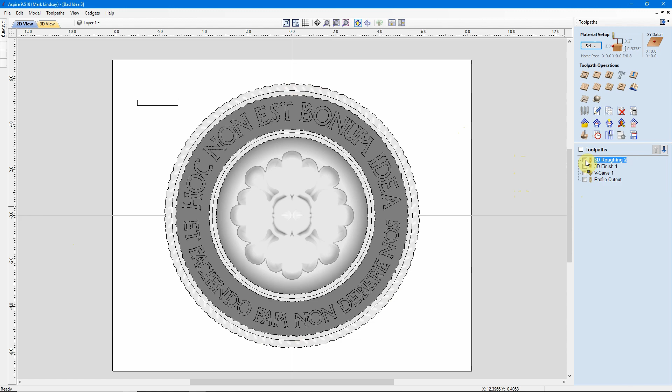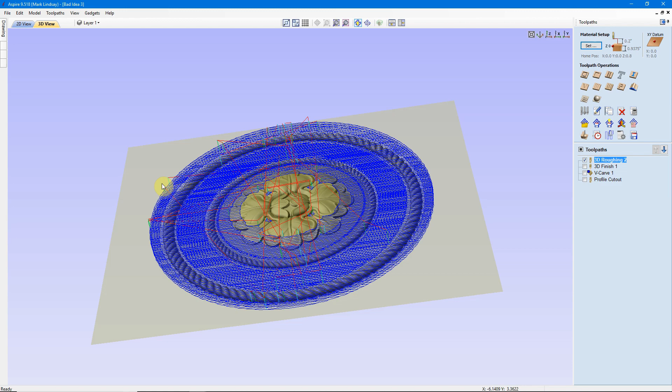Other times, as in the case of the 3D sign I cut before, when we look at the toolpaths we have a 3D roughing toolpath. In the 3D view we can see the red lines in the illustrated toolpath — these are all rapid moves. The blue lines are plunge moves, and the green lines are retract moves. We can see they're willy-nilly all over the place.

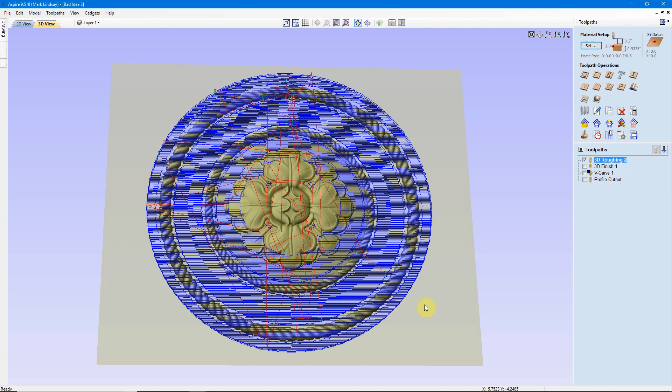What the software attempts to do is start from the home position and move to the closest starting point and start carving, in this case in a raster pattern back and forth. It will get to a certain point, lift up, and move over to another area. For instance, it carves away a good portion of what's down here, then lifts up and moves up above and starts carving back down this direction. There doesn't seem to be any real rhyme or reason to this.

In a 3D toolpath, there's not a lot you can do. You don't have much control over how the software decides where and when it's going to cut. We can double-click the toolpath to go in and take a look, and there's no real way to choose where it's going to start or stop — it's going to make up its own mind when it's going to cut what.

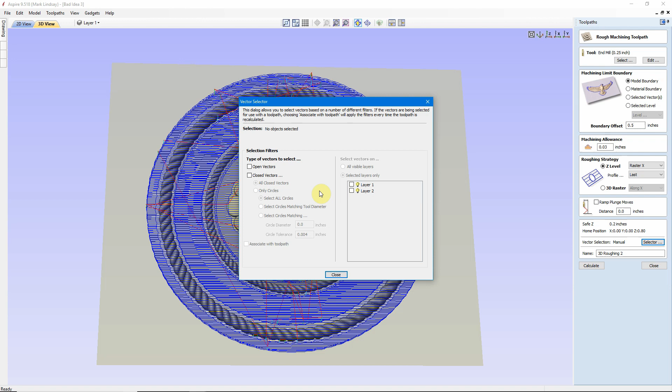Down here where it says manual vector selection, this area is mainly to associate that layer with the toolpath. So this doesn't really help you decide what it's going to cut or when it's going to cut it.

Now that's in a 3D toolpath. If we go back to our rectangles, when it comes to cutting a pocket or cutting a profile, we do have a little bit more leeway — a little bit more control over what's going to cut when.

Let me start by selecting all of these vectors here and making sure all of them are within my box. Let go, and they're all selected. Now let's come over here and do a pocket toolpath.

I'm going to ignore everything up here right now until we get down to Use Vector Selection Order. If we check this box, the software is going to look at what order I selected these vectors in and apply the toolpath appropriately. Since I started down here and selected up to the top, that's the way the software is going to attempt to calculate the toolpaths. We'll calculate, and we see that's exactly what happened.

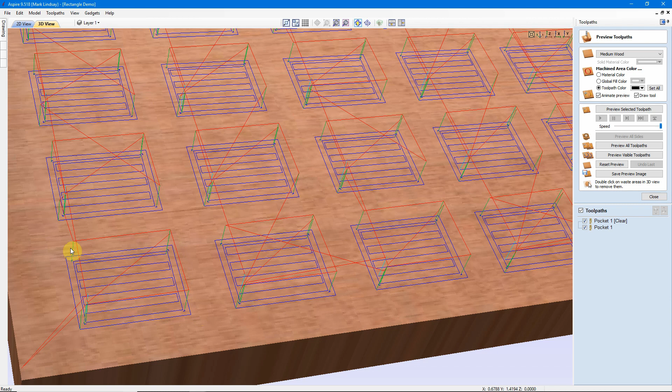We have our rapid moves here. Let me scoot in and zoom over, and we can see a lot of rapid moves in red, a plunge in light blue, and then a bunch of retracts in green. Now we can kind of see how it's going to do that by previewing.

If we look at the clearing toolpath and get rid of the cleanup toolpath, and just look at how it's going to come in and clear all this out, we can see exactly what's going to happen and how it's going to machine this pocket by coming up here under Preview Selected Toolpath to this button right here. You see how that little bubble pops up and it says Run to Retract.

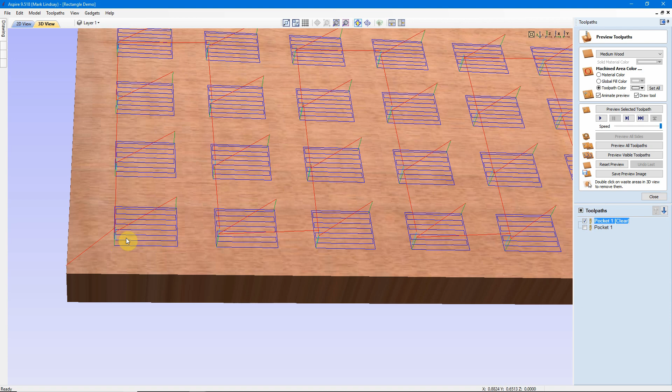What that's going to do is run this toolpath from this plunge point to the next point where the bit will retract. So I'll go ahead and click that, and we see it carved out most of that pocket. Now I'll do it again and it will run to the next retract point.

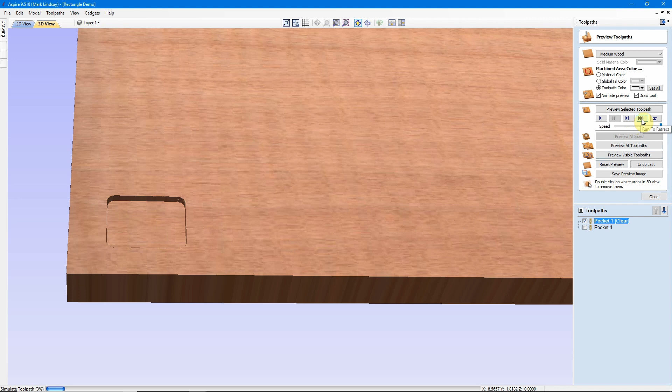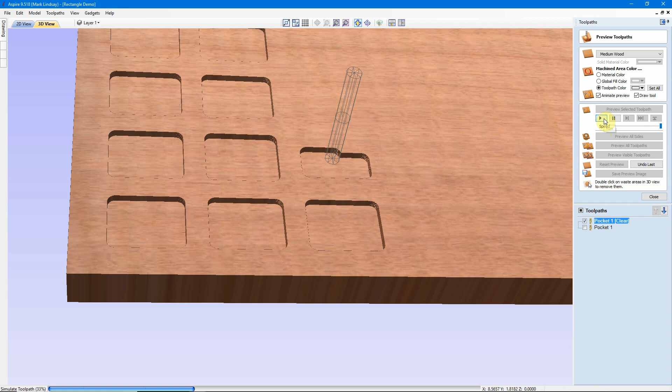And that's where it did its profile to clean up these rough edges where the bit went back and forth. Now we'll go to the next retract. We see it moved up to this next box here. I'll do it again, and we see it did its profile. Now I can go ahead and run the entire toolpath just by hitting the run button, and we see it's going to finish it up.

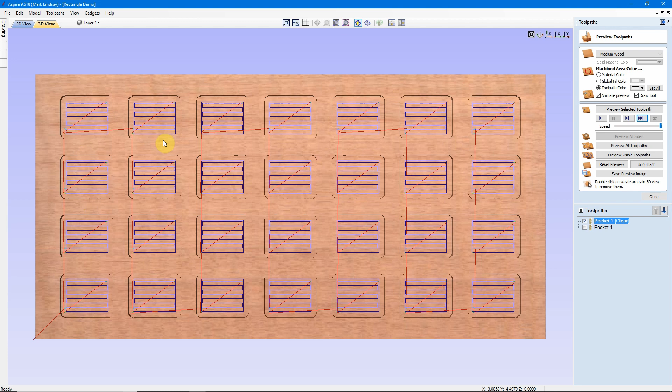Now we see the order in which it's going to move. I'll come back for a straight Z shot, and turn on the visibility of the toolpath by clicking the check mark here. Looking at these red lines, it's going to rough out this one, then move up to this one, up to this one, up to this one, then come over and go back down. That'll work for us.

But let me reset the preview, and I'm going to try a different order. What I'll do is draw a box around these rectangles on the bottom, hold down Shift, and then select these. Still holding down Shift, I'll come back and select this row, then this row.

Now, if I close my preview and go into Pocket, I'll change nothing else up here, but I'll click on Use Vector Selection Order. I selected this row first, this row second, third, fourth. It should calculate a toolpath to run all of these first, then come back and either start here and run this direction, or lift up and come back this way. The software knows to take the shortest route possible. Let's see if it does so.

And it doesn't. It's going to lift up, come over, carve this one, move down the line till it gets to the last one, then come back and start here. Close that, we'll come back.

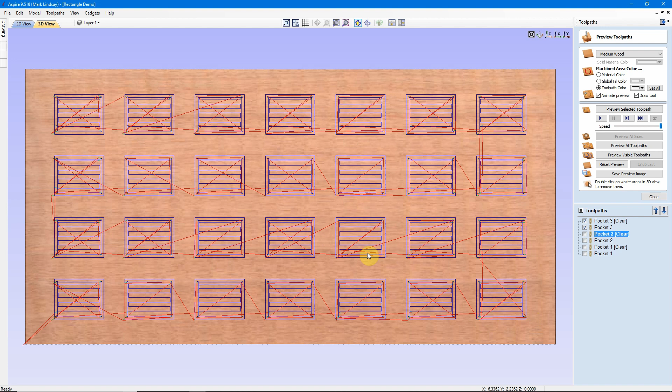Now I'll select them one at a time. Okay, I started this way, went down the line here, up here, over. Let's do another pocket toolpath, use vector selection order, and calculate that. Now instead of getting to this end of the line and running all the way back here, it just jumps up to the next one. Let me preview that just to make sure.

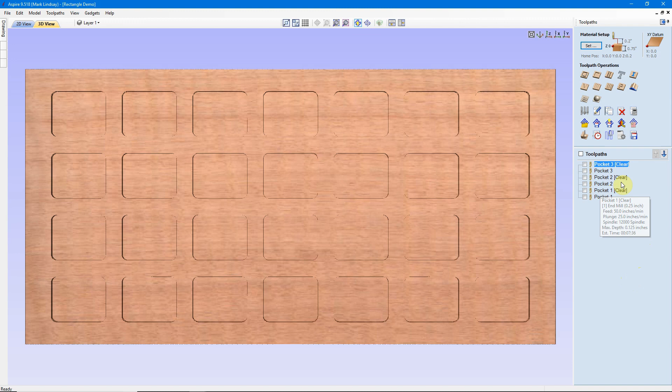And it's machining out the way we expected it to. Now, you may be wondering why I'm even talking about this. Let's check it out and we'll see. I'm just going to use the pocket clear for a moment here. We'll select all three of them and come up here to Toolpath Summary, and we can see that each one has a different time.

Pocket 1 we did with no modifications. We didn't use vector selection order at all. We let the software decide where it was going to go, in which case it was running up and down and coming back and forth this way. And that has the shortest machine time of 7 minutes 36 seconds.

We then, for Pocket 2, went left to right, running along this way, lifting up, coming back up here, and going this direction. That gave us a running time of 7:54. I then came back and went this way, had it come up here to cut this way, and back over here to cut this way. We see we have a machining time of 7:39, but it's only longer by 3 seconds.

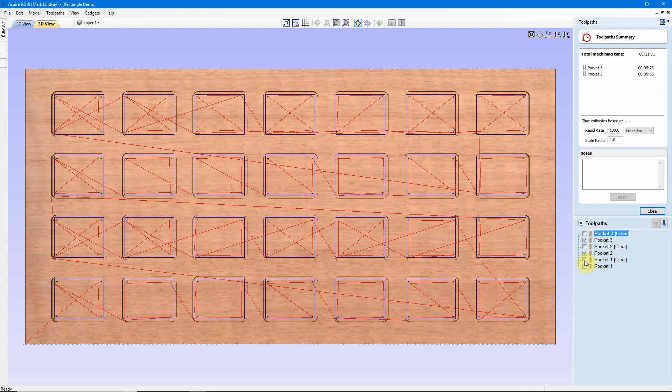So let's go ahead and turn those off and look at our finishing toolpaths. Pocket 1 is shortest by about 20 seconds. So, basically, letting the software decide where it wants to go, when it wants to cut there, is the way to go.

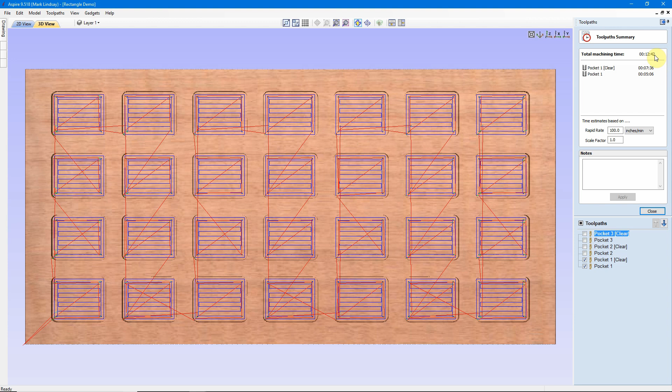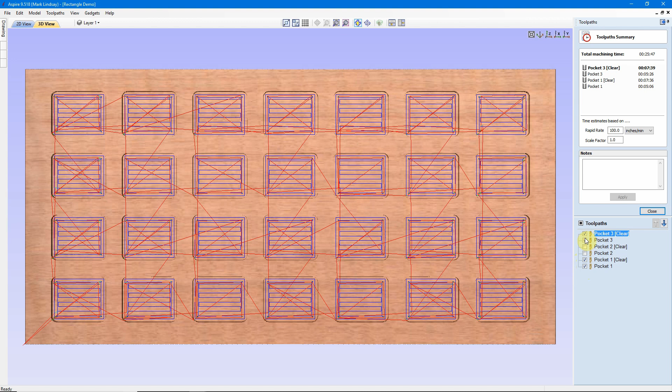That's going to give us a total of 1242. This one, 1329. And this one, 1305. So it doesn't save a lot of time, but if you're in a production environment, time is money. In this case, letting the software decide where it's going to cut and when would be most advantageous to us.

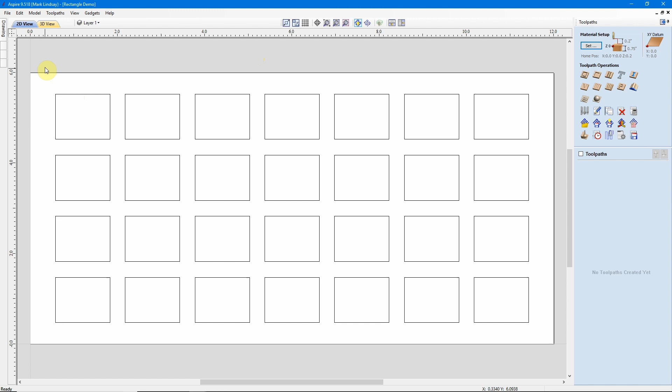Now that's for pocketing. When it comes to profiling, there are some other considerations because we have a few more options. So let me select all of my rectangles here, and we'll do a profile toolpath. Right off the bat down here, we don't see anything about use vector selection order, but if we come down here, there's an order tab right here, and we get a lot of options.

We can choose the vector selection order, which is in which order did I select each of these rectangles. We can choose to run from left to right. We can choose to run from bottom to top. We can choose to use a grid, or we can choose to allow the software to take the shortest path.

And we can do this by checking or unchecking these boxes, and we can check more than one. Now you may be wondering why I'm even discussing this when it comes to profiling. This is a small project, and I'm cutting a small series of rectangles here.

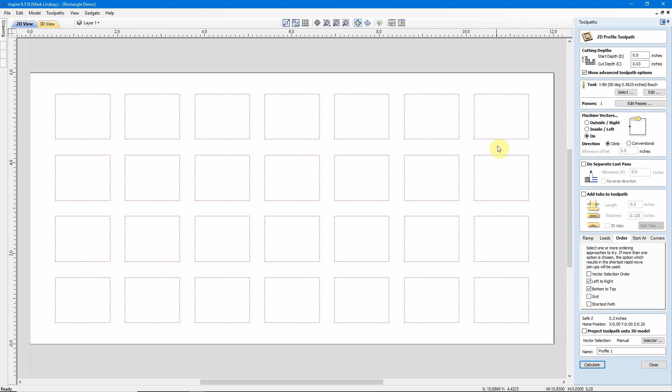But if you were in a production environment and you needed to cut all these rectangles, you could technically set your vector selection order to go from left to right, bottom to top, and as soon as this rectangle is cut, you can pull it off the machine and start finish sanding while this is being cut. This just allows you to select which way your axes are going to move so that you can remove parts and move them on to the next step in the process while it's finishing up the cuts on the rest of these parts. Now let's go ahead and take left to right, bottom to top, and calculate that and see what we get.

We can see here we have a rapid move that comes this way. Scoot it up a little bit. There's the plunge and retract on the same corner. And the same thing here, a plunge and retract, a plunge and retract. And it's going to move down this direction here from left to right, then move up, bottom to top. Come back this direction, come back this direction, and cut all of them out, giving us time to grab this one and move it along to the next part of the process while this one's cutting, and so on and so on. That's why some of this stuff matters.

It's machine time as well as convenience for you. If we look at this here, our estimated machine time is about 3 minutes, 16 seconds. These are small parts, and it's a small piece of material. There's not a lot of savings worth really going after when we're talking 3 minutes and 16 seconds.

Now, if you project this up to a full sheet of plywood and you're cutting out drawer fronts or cabinet sides or something of that effect, it could mean a big difference. And the ability to cut out a part here, a cabinet side for example, and pull that out and get it along to the next process, maybe edge banding or sanding or what have you, while it's cutting out a cabinet bottom, that would be advantageous to you.

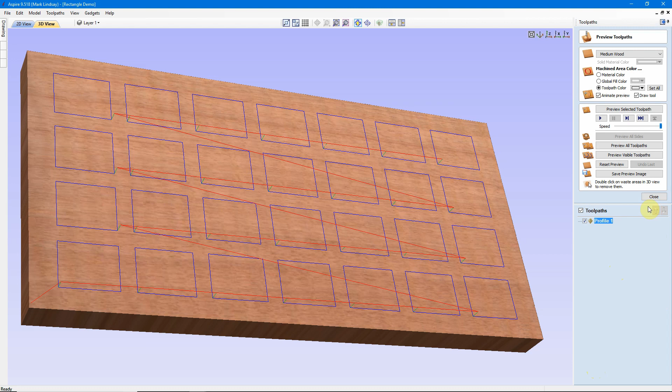So for something this small, there's not really a lot of time savings to be had by adjusting whether we use the vector selection order. Let's go ahead and try that. Calculate, and we'll close that. Now we'll look at it. It went from 3 minutes 16 to 3 minutes 29, so it added 13 seconds. You're going to spend more time walking over and picking the material up off of the table than you're going to save. So there's not much saving to be had here, really.

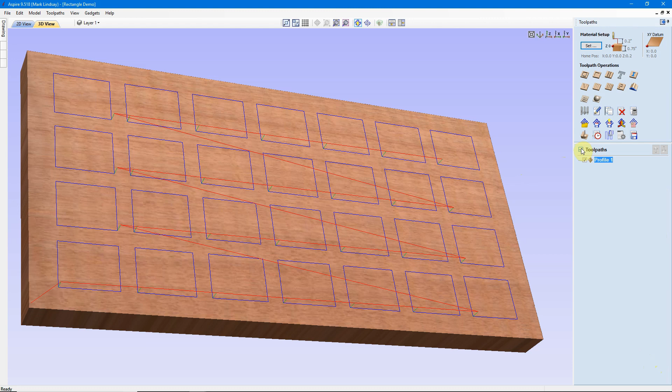So we'll go ahead and we'll close that up. Just know that out of all of the toolpaths, when it comes to your vector order, you have the most control when it comes to which order the toolpath is going to run. You have the most control in a 2D profile toolpath. We'll close that, and I'll get into another situation where we're talking about Vee carving.

Now in Vee carving, there is some savings to be had. I've run 3 or 4 different toolpaths here to demonstrate what I'm talking about. We can turn on the visibility and you can see that they're all basically the same thing. It's just the order in which the vectors are selected, plus a couple of other factors.

This VCarve here, I'll turn it on. It's just a simple straight rectangle. There is no selection order. It's a single part. It doesn't matter. So I only ran one to simulate.

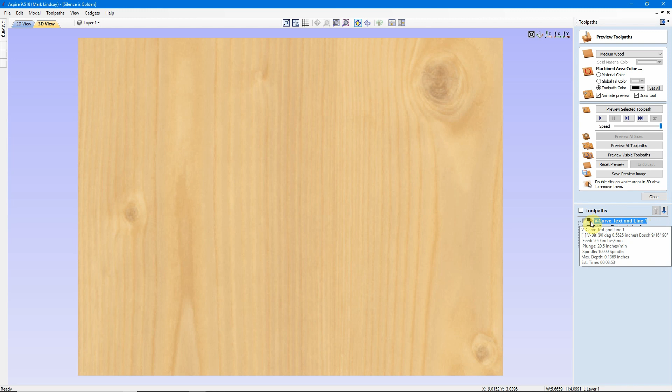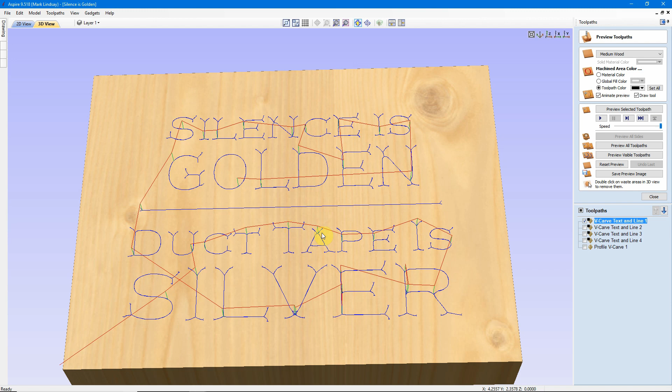But if we go over here into our preview window and we select number 1, we look at our movements here, we can see that the bit is going to start from the home position, come over and start cutting the S, lift up, go to the I, but then it's going to jump up here to the U, the C, the T, this T, the A, and come back around and do it basically in a circle and kind of hopscotch around a little bit.

But if we turn off number 1, turn on number 2, we see it starts down here on this corner instead of up here, and it moves around again just wherever it wants to go. It finishes down here, lifts up and comes up to do the C, then the T, then the T, then the A, and then comes down, does its thing down here, then comes back up.

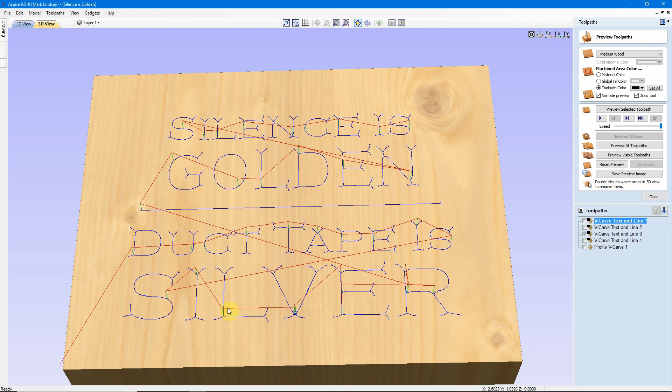We'll turn that one off, come up here for this one, and in this one it goes up here and starts cutting up here. It does cut the entire line of text, then comes back down to the S and then goes over this way, then comes up.

Now I'm going to show you what each one of these represents. So we'll start here with this one, number 1. I will double click on the VCarve toolpath, and we see here I'm not using vector start points and I'm not using vector selection order. This is how the software decides it's going to cut it itself.

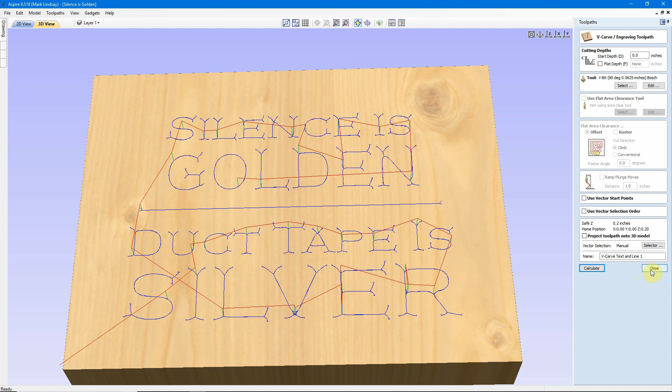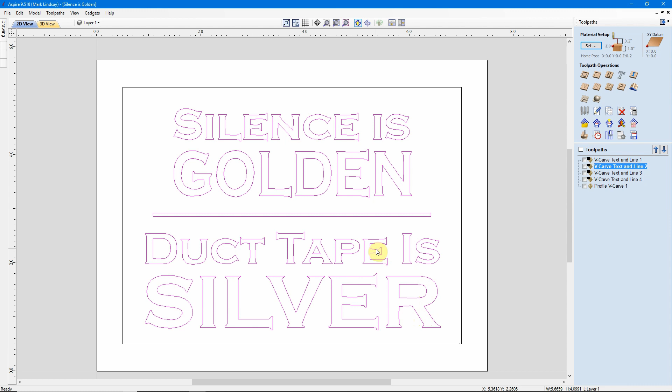We'll close that one, turn that off, turn the visibility on this one, and we see this toolpath. I'm using the vector start points. What I mean by vector start points - turn that visibility off, we'll come back over here. All of this text has been converted to curves, and when you convert to curves, it's no longer a text object, it's a regular vector.

And as you know, every vector has a start point. Now, I'll come back over here into my drawing tab and I'll need to ungroup everything. So we ungroup, and we'll start down here since our start position is down here. I'll ungroup these and we see we have separate vectors. Now if I go into node editing by typing the letter N, I can click on this vector and we see the start point is down here in the corner.

The bit is going to lift up to go cut this S, and that's where it's going to start the cut, at the start point. Same with the I. Same with the L. Same with the V. It's going to use those vector start points.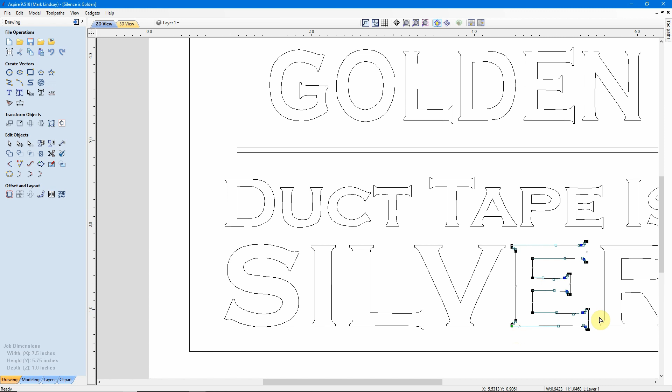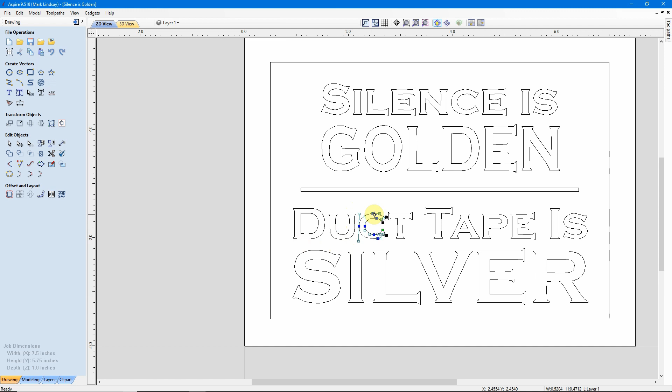But now we get up here into the letter R, and there's a start point up here. That'll become relevant a little bit later on. The inside of the R, it's right there. Go up to the D, it's down in the bottom corner. The U is fine, up here in the top corner. And the C, it's over here. So there doesn't really seem to be any rhyme or reason as to where the start points are.

This will become relevant a little bit later. So right now I'm going to tap the letter N to come out of node editing, and I'm going to undo all of that ungrouping. So we'll come up here to Edit, Undo Ungroup Vectors, Edit, Undo Ungroup Vectors, and that was the last edit I made to this file. I can't undo anything else. So now when I select that, they are all regrouped.

And my toolpath is just fine. Now we'll come over here and we'll take a look at this toolpath.

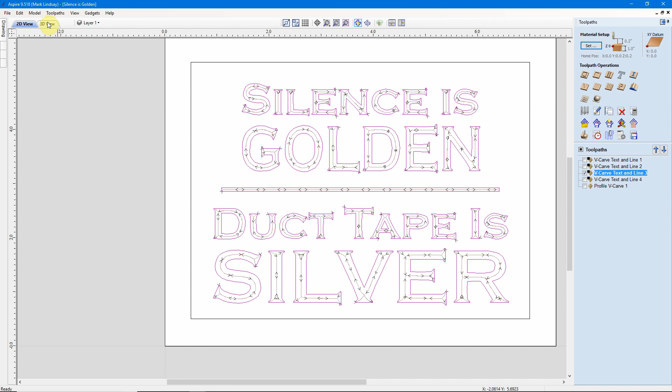I'll double click it, and we see Use Vector Selection Order has been selected. So evidently, by surrounding all of the text to select it, the software has decided that the best way to machine it using that vector selection order is to come up here and start with the D.

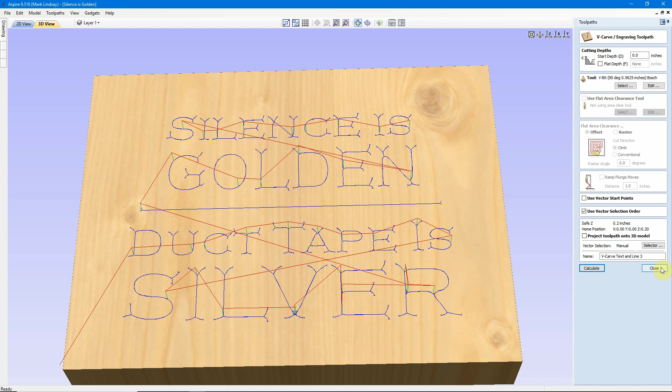We'll close that, turn off the visibility there, turn on the visibility here, and I've selected both Use Vector Start Points and Use Vector Selection Order. So it's going to take both of those things into account, and as we see, we had the start point here on the S down in the bottom corner, and the same with the I, same with the L, same with the V, same with the E, but then it gets up here into the R.

That's when things changed. And up here we have the C on this corner, we have the U up here. This is where things changed, and the start points didn't actually make any sense. Like, why would we have a start point up here on the E? It should be down at the bottom corner.

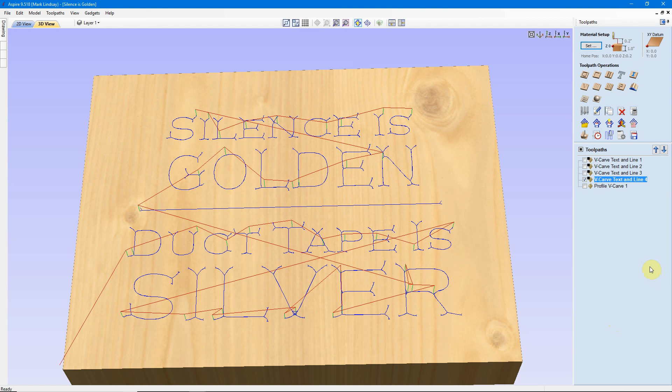So using both the selection order and the vector start points, it had to calculate our toolpath taking both of these into consideration. Now, let's select all 4 of these and take a look at our toolpath summary and see which one is going to take the longest to run.

This is highlighted in bold because that's the toolpath I have selected down here. I could just as easily click on number 1 and you see that comes up in bold. But if we look at all of these toolpaths, even though they're all going to take less than 4 minutes, number 2 here seems to be the shortest run time, 3 minutes 48. Now 3 minutes 48 seconds may not seem like a whole heck of a lot, but if you're in a production environment or you're carving 15 of these, time is money.

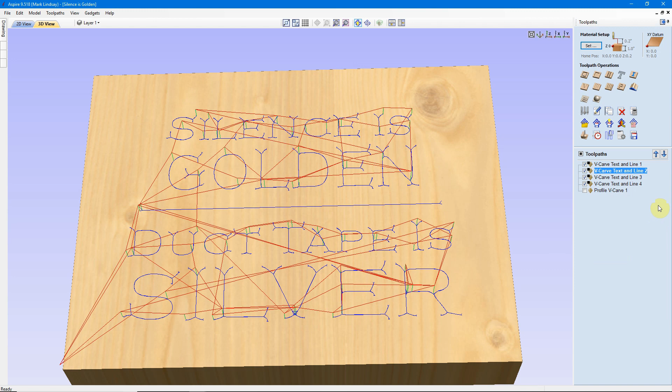So let's go back and take a look at which one that is. We'll shut off the visibility to all of those, turn on the visibility to that one, and we'll see using vector start points was the most efficient use of our time. So changing this from the way the software had decided was the most efficient use of time to using the vector start points is beneficial to us.

Well, now knowing that, maybe we should get in and change these start points to where it's something a little bit more realistic.

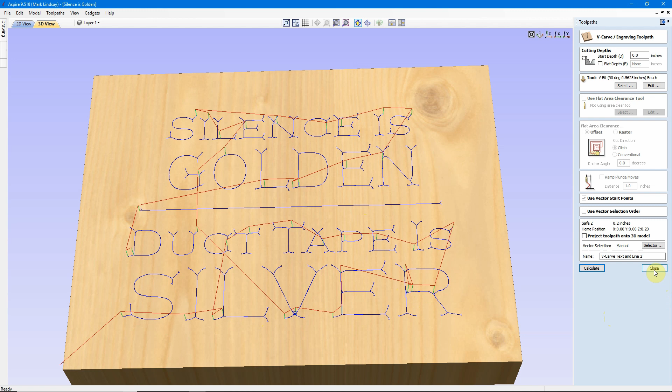So let's see if we can save any time by doing that. We'll close this. We're going to remember we want to use vector start points. I'll go back over to my 2D view. And again, I'll ungroup everything, then ungroup it again. Then we'll come back over here, go into node editing.

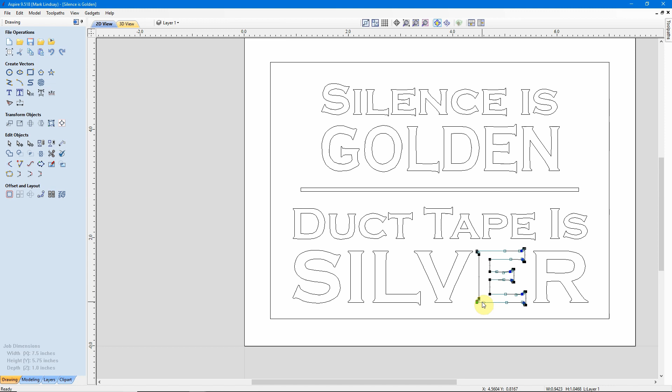The E is okay. The R, let's move the start point from here down to here. Make start point. That's already okay. Let's go over here to the D. Start point is fine there.

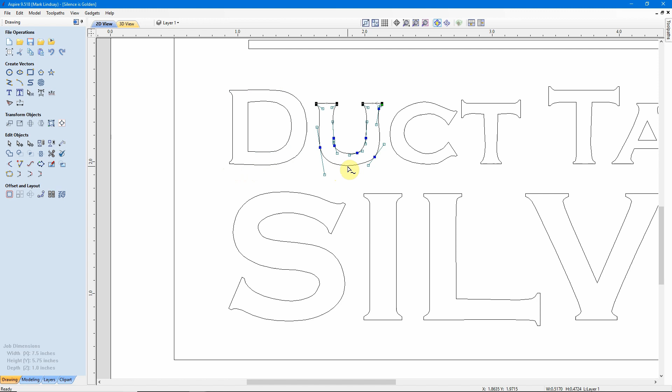And it's fine there. The U, this makes no sense. Let's start it right here. Make start point. Same with the C. Let's go from the top corner to right here. Make start point.

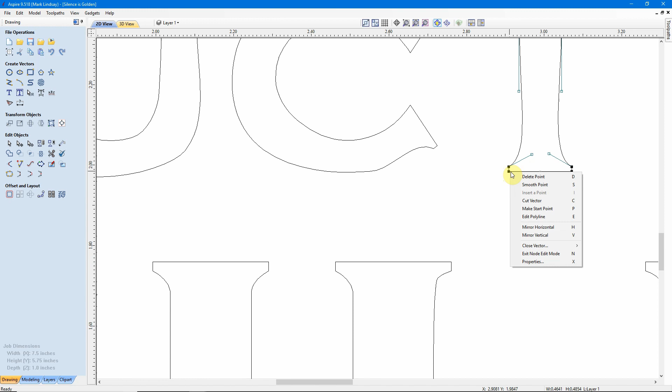And same with the T. I'm going to go through each letter and change the start point to something a little bit more realistic, in that the cut will end here on this C. Let's let it retract out of the material and come over and start cutting this T down here in the bottom corner. I'm going to go through and do that on all of the lettering.

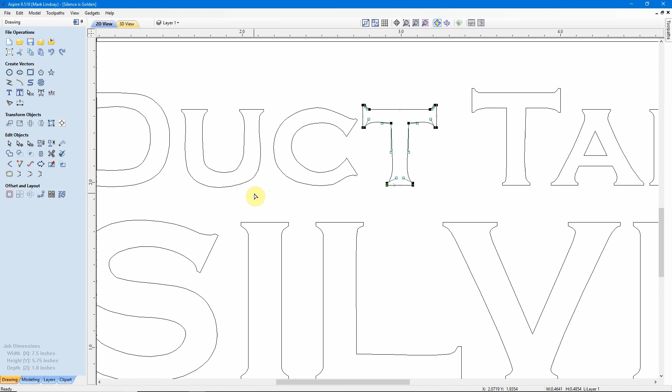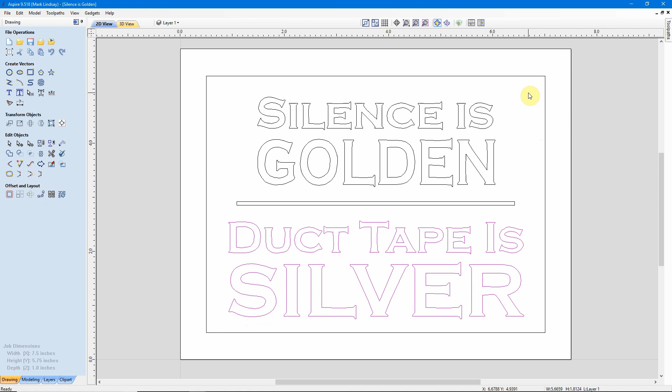Okay, with my start points changed, I now want to go ahead and regroup all these. I'm going to regroup this section of text into one group. I'm going to make this section of text another group. Then I'm going to group them all. That way I can come in and edit one section without affecting the other.

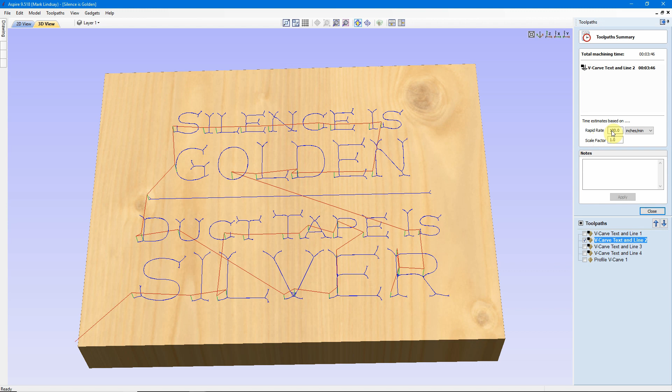So let's go over here and we'll recalculate this one using vector start points. We'll calculate that toolpath. We see there's a little bit more logic to the way it's going to run. Now we're down to 3 minutes 46. So doing all of that only really saved a couple of seconds. But again, if you have 20 or 30 of these to run, it can make a difference.

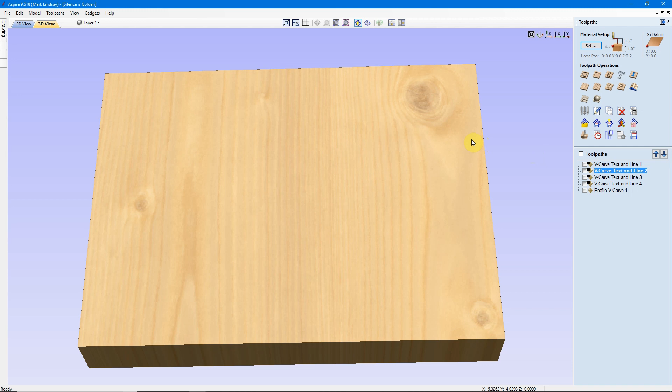I'm going to go ahead and end this right here. Basically, it's all about vector selection order and how much or how little control you have over it. Generally speaking, the software tries to create the most efficient toolpaths with as few plunges and retracts as possible, to try to keep the bit in the material cutting rather than lifting out of the material and moving.

And oftentimes what we think is a waste of time - why doesn't it just plunge in and cut the whole thing, cut this whole line here? Well, a lot of times it's more efficient to cut these three, jump up and do these two, then come back and grab this, then go down here. It sounds counterintuitive. It sounds funky to us.

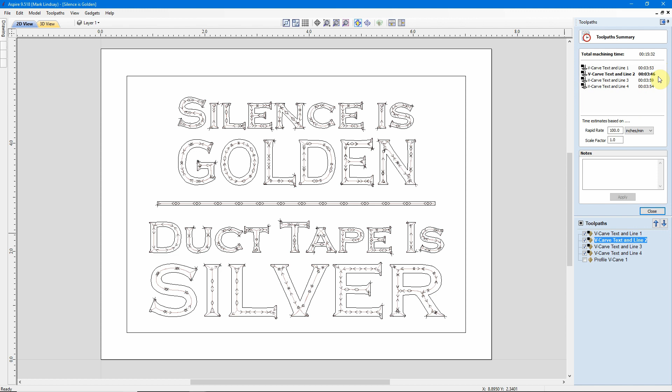But by looking and comparing all of the toolpaths, we can see that sometimes there is some time to be saved by creating our own toolpath order or our own vector selection order, but more often than not, there really isn't. It just depends on what you're doing.

And this is another reason to pay attention when you get into node editing. Pay attention to where your start point is. If I select this outline, type N to go into node editing, my start point is way up here, when my home position is down here. So technically this should be a start point here, because there's no sense in this bit lifting up from here, going all the way up there in a rapid move, plunging in, and then starting cutting. Makes more sense for the bit to lift up from here, move right there, then cut.

It's going to start and stop on this point. It only saves a couple of seconds, but again, time is money.

I hope you got something out of this video, and I hope it didn't just confuse you like crazy with all this.